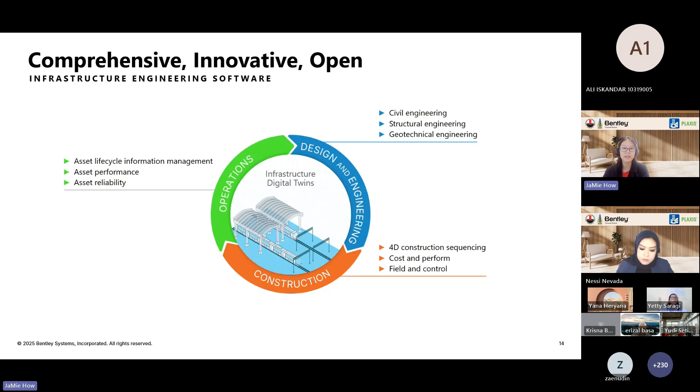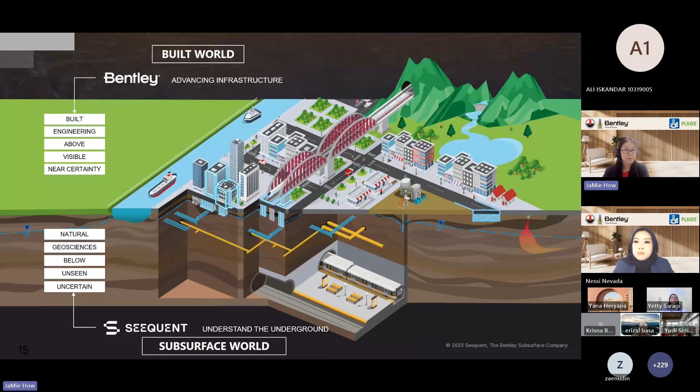In most of the solutions, what we can see are the above ground solutions in the built world, where we can see it easily because they are all constructed above ground. So we also have a group of solutions which covers the underground, whatever is in the subsurface world under the Seequent group. That is grouped under the Bentley Geotechnical Engineering Solutions, and it comes in three main categories as shown here: geotechnical information management, geotechnical modeling, and geotechnical analysis.

So for geotechnical information management, we have OpenGround for you to manage and consolidate all your subsurface information, so that you can all refer from one single source of truth, all the way from site, after lab test, and to the designer as well.

And then for geotechnical modeling, we have Leapfrog Works, which you can use to model the subsurface geological profile for you to make better decisions because you can visualize what is underneath more easily. So this can help you save time in decision making as well.

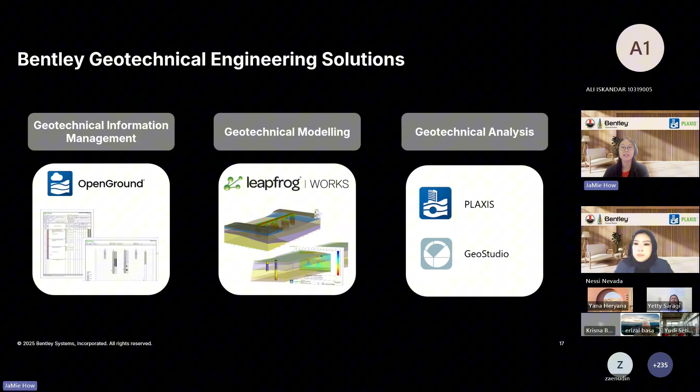And lastly, in terms of geotechnical analysis, we have PLAXIS and GeoStudio. Today our focus will be on PLAXIS, which is the finite element solution, and GeoStudio is our limit equilibrium solution for slope stability analysis purpose.

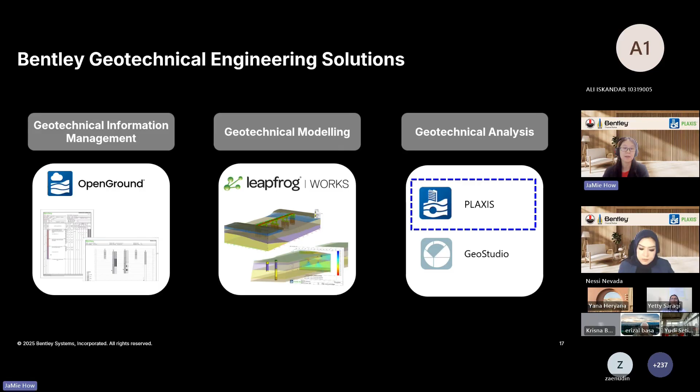In terms of geotechnical analysis, it covers many different types of work, all the way from offshore to nearshore to upstream like dams, and to on ground as well for buildings, for utilities, infrastructures like roads, rails, underground tunnels, for mining work, and also for infrastructures like airports. Geotechnical work covers a huge work scope because anything that we construct is either on ground or underground, so we always need to assess what is the impact of the structure and the loads from those structures or utilities, and how the ground reacts to them. This is where geotechnical analysis comes into the picture.

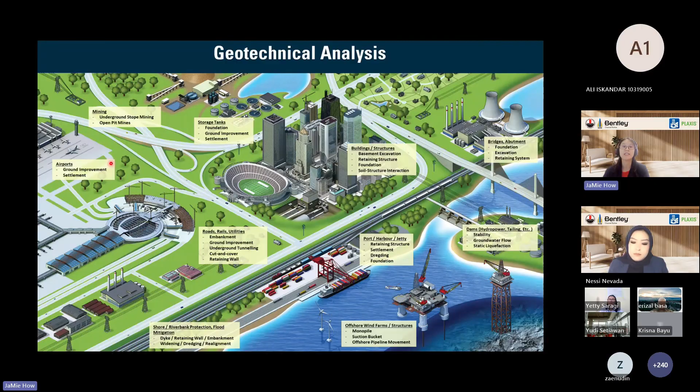In terms of PLAXIS, it comes in 3 different products: 2D, 3D, and Monopile Designer. PLAXIS Monopile Designer is for laterally loaded monopile design. This is mainly for offshore wind farms where we have single large diameter piles for the wind turbines.

And PLAXIS 2D and 3D each come in 3 different product tiers, as you can see here. The lowest tier is called just 2D and 3D. Then we have the advanced tier, and we also have the ultimate tier. This slide here shows a simplified comparison between the 3 product tiers of PLAXIS 2D and PLAXIS 3D. For very basic analysis, just plastic and safety analysis, you can always go for the lowest product tier.

If you require anything more, such as consolidation, steady state groundwater flow, creep, pseudostatic analysis, and degradation of soil due to cyclic loading, then you will require at least the advanced tier. For the ultimate tier, this is the highest tier. If you require more advanced analysis like transient groundwater flow, transient loadings like vibrations, traffic load, liquefaction, seismic load, then you will require the ultimate tier.

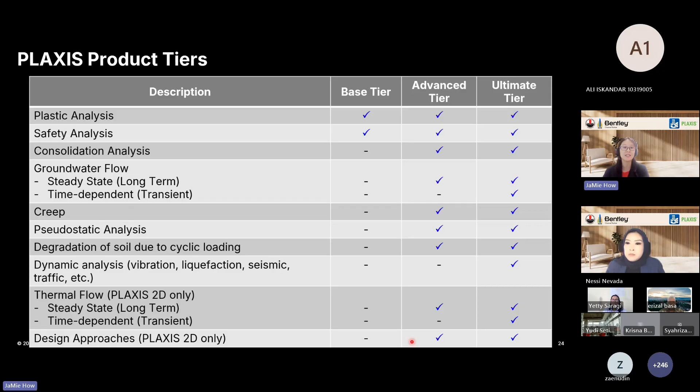And if you are designing to Eurocode, and where you need to have input of the design approaches and the partial factors, then you require at least the advanced tier. So today's topic is on excavation and shoring. This is just an illustration or an image of how it is usually done in PLAXIS.

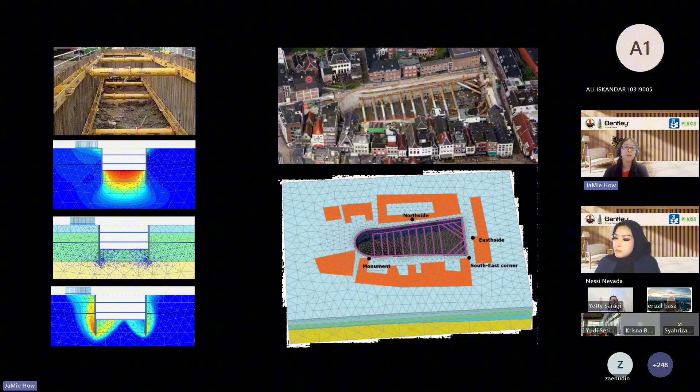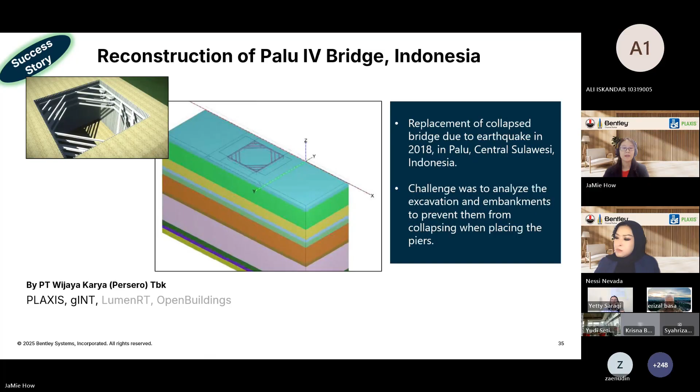In this case, as you can see, PLAXIS is used for the excavation check of this temporary shoring of the bridge foundation. Next, we move on to a quick introduction to the Virtuoso Practitioner License.

Virtuoso subscription is a flexible subscription. It can be purchased by any entity, whether a huge entity or an individual—anyone can purchase it. This subscription is also very flexible: it's only for 12 months, and there is no commitment for you to renew. So if you only have a project for 2-3 years and only need the software for that time, this is a solution for you, because you can just use it and then let it expire. When you have a new project later, you can purchase a new subscription again.

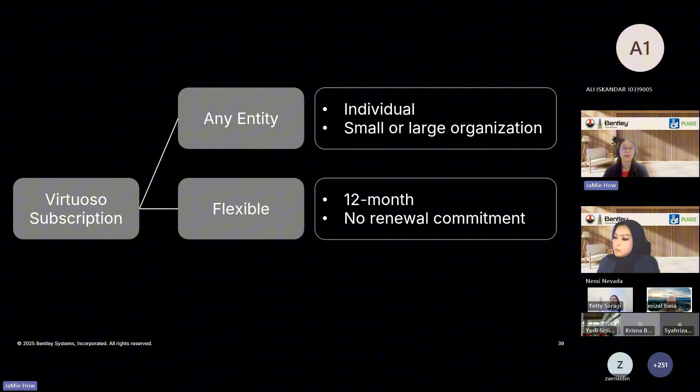Another thing users like about this subscription is the keys that come bundled with the license. Keys are like tokens or credits that users can redeem when they purchase a license. For example, if you purchase a PLAXIS license for Virtuoso, it comes bundled with keys, which help you unlock different types of free trainings. All these trainings are online, and can be standard training or customizable to your team's requirements.

For example, if you purchase the software today and payment is made, and tomorrow the license is delivered to you, then within 2 to 3 days from delivery, our technical team will be in touch with your team. You can then discuss your training requirements and how you can utilize the keys to carry out training for your team. It can be a standard recorded training as shown here—if you want to learn just the basic workflow, there is a recording you can watch as many times as you want, whenever you are free, for a period of 90 days.

Other than that, we also have live training through Microsoft Teams with our technical experts, so the content of the training can be customizable to what your team wants to learn. For example, if you purchase PLAXIS just for an excavation project and you're not too confident in it yet, you can discuss with our team and they will work out a module suitable for you using the keys.

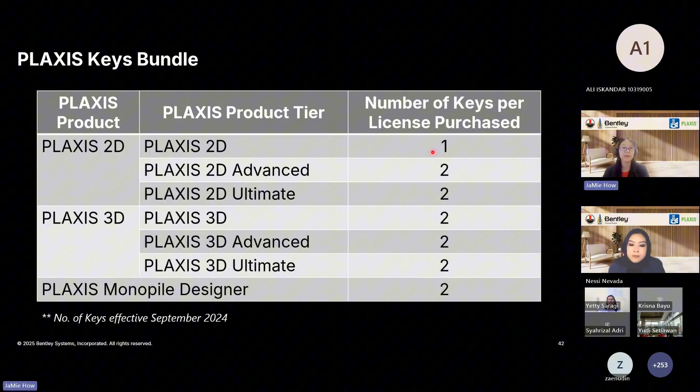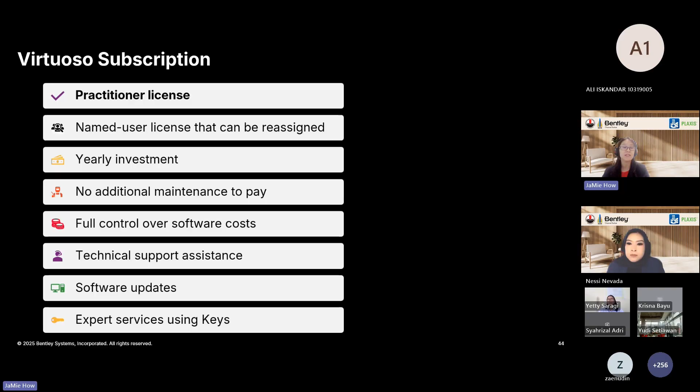Throughout your active subscription period, you get technical support through ticket submission. And if there's any new release of the software, you can download it for free, the latest version, throughout your active subscription period. Lastly, we have expert services using keys, which we explained earlier, for you to redeem free trainings for your team.

In today's context, we're focusing on the structural element and how we can get the structural response of our temporary shoring for our excavations. So that's very important. To begin with, in PLAXIS we offer a wide range of structural elements, and we're going to look at a few of those that are related to excavation modeling.

To begin with, in practice we actually differentiate the behaviors between a thin wall and a thick wall. For the former, the thickness as well as the geometry effect nearby are actually negligible, and plate element, if you've heard of it, is sufficient to represent the dominant behaviors other than end-bearing. So that's when you emphasize the bending behavior of the retaining wall - plate is actually the structural element that you would use to model the retaining wall.

And for the case of a thick wall, we may want to model the real thickness using the volume element with the constitutive soil model parameters. But the drawback of modeling the wall as a volume element is that no structural response will be available or directly available.

So there's, however, a trick - using that you could actually introduce a plate element just for the extraction of structural response inside a volume wall. So there are two approaches when it comes to modeling the retaining wall: either you model it as a line without physical thickness, or you model the actual thickness using a volume element.

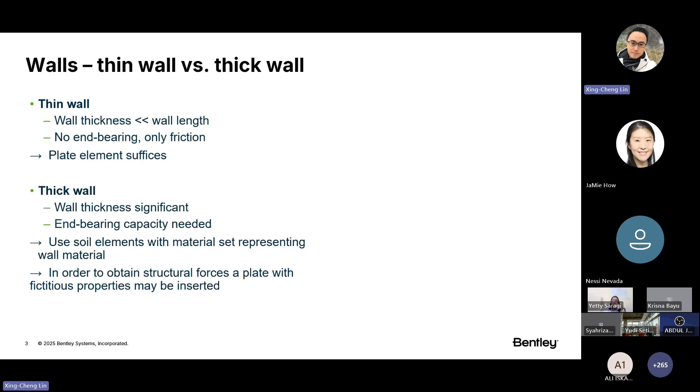So introducing the dummy beam approach that's related to thick wall modeling - that means now you model the wall as a volume, as a soil cluster. In this approach, we model the real thickness of the wall as well as its material properties using the relevant constitutive soil model. And in the geometry center, in the center of the wall, as the image shows, we insert a weightless plate element, but of course with some reduced stiffness - often in the order of 1,000 times or even 1 million times. And no interface in this case should be applied along this plate element.

After the calculation, we would multiply the structural response - say the bending moment or the forces - by the same factor that we have reduced. The initial vertical stress in the soil should be added to the axial force of the plate in order to get that genuine axial force of the wall.

So the idea is that you insert a dummy beam with reduced properties because your volume wall and its soil property already account for the strength and stiffness of the retaining wall. So now you insert this plate in the center of the volume wall just for extracting the structural response of the calculation - that means bending moment, axial forces, or shear force. The idea of introducing this dummy beam is just for the extraction of structural response. Therefore, you should not actually input the actual property of the retaining wall for this plate, otherwise you'll be over-accounting for the strength and the stiffness of the wall.

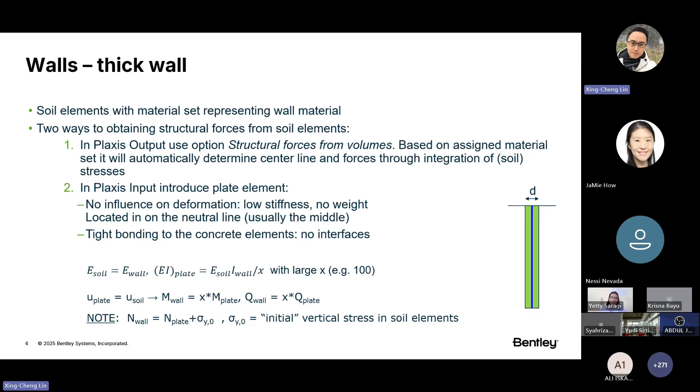Combined. So as you know, the excavation can be stabilized by struts or anchors, or even a hybrid system of both. For the case of a strut, it's the compressive resistance that's being mobilized, while for the anchor element - in this case it's fit for purpose - it supports the pre-stressing option as well.

As you can see from the image, when a half model is considered, we may use the point element like fixed-end anchor, together with the definition of one of its properties called equivalent length, and also the orientation vector.

That means although it appears as a point in the model, numerically the program actually considers this as a half span of the actual strut element spanning across the entire excavation. So although it appears as a point, some numerical formulations allow this point to behave like a half span of the strut element.

This is normally relevant when you're doing a half model, because when left and right are in perfect symmetry, you may cut the model into half, just to save some computational effort.

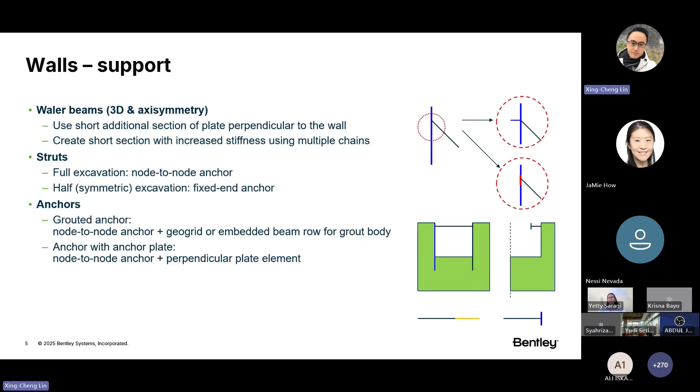For the case of a tie-back system using anchors or soil nails, the excavation is stabilized by the tensile resistance as well as the bond stresses, if the soil nail or grout anchor is being considered. In that case, you may consider a hybrid system depending on what kind of anchorage is relevant for the problem.

You can, for instance, use a combination of different structural elements to simulate the geotechnical applications of a grout anchor. It comes with two parts: the free tendon part of the grout anchor, which we normally model using the node-to-node anchor structural element from PLAXIS, considering the anchor group spacing and the main structural behavior of tension, while no interaction with the soil is required for the free tendon part. Basically, you just want to mobilize the tension for the free tendon part of the grout anchor.

The grouted part can be modeled using GeoGrid or embedded beam. The drawback of using GeoGrid in this case is that it presents a rigid connection with the surrounding soil, which does not give a good resolution of the genuine grout and soil interactions. So embedded beam is the preferred choice here.

It actually accounts for the relative slipping behavior between the grout and soil. So in short, the soil structure interaction, the grout and soil interaction, those kinds of relative movement and friction bond stresses can be mobilized if you consider the grout as an embedded beam element.

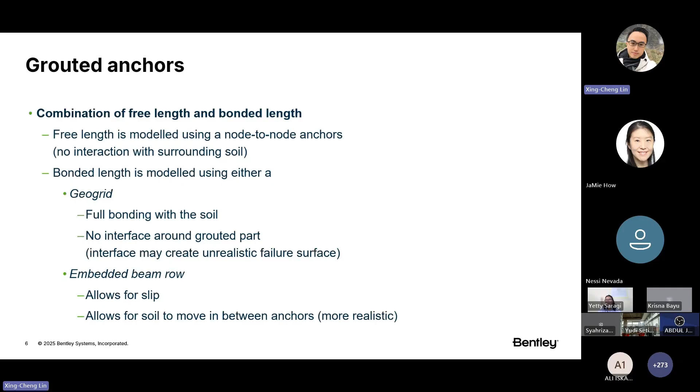For the embedded beam, we have a special interface that accounts for the soil structure interactions. So this is the typical combination if you want to model this kind of hybrid reinforcement system.

This, however, is not always the case if you consider a different combination. Let's say you don't use embedded beam for the grouted part, but use a geogrid element instead. In that case, you will see that part of the axial force actually goes to the soil, which is less realistic - these are the consequences.

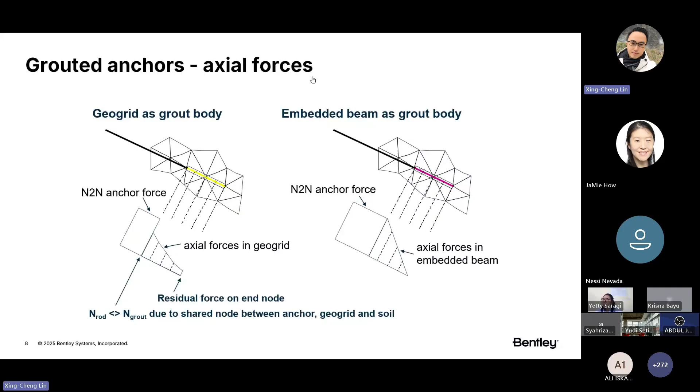The application of grout anchor involves some engineering uncertainties, for instance the size and the bonding between the grout and the soil. A typical application requires a pre-drill of some 10-20 meters to reach hard material for better anchorage, and over such a long span, certain parts of the borehole might very well collapse, resulting in some undersized reinforcement.

That means although the grout is intended to have some 250 diameter grout size, since the borehole collapses, you could very well end up with some undersized grouting reinforcement.

So this is something beyond what PLAXIS could handle. What happens in PLAXIS is an ideal situation, so everything is in perfect consistency. So this is something you need to be aware of.

Preferably you have a representative pull-out test in the field. You can use that to calibrate the numerical resistance in PLAXIS, to at least avoid over-prediction of the performance. So if you have a few pull-out tests of the anchor in the field, you can model it in PLAXIS and use it to calibrate its capacities.

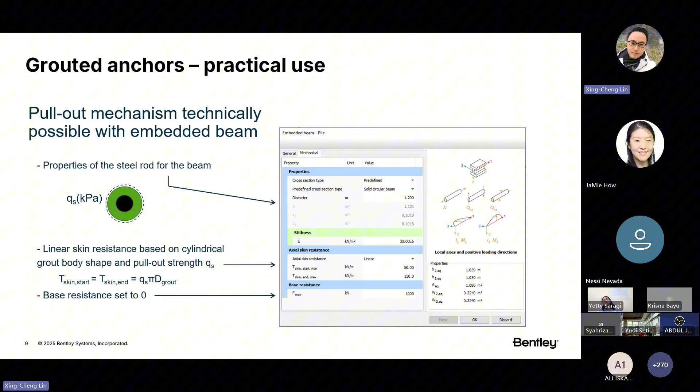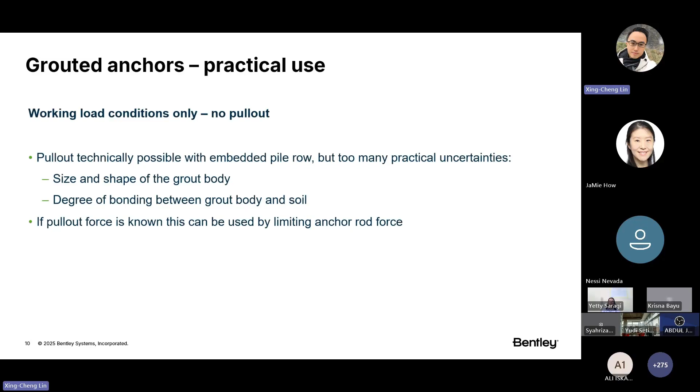So when modeling the grout using embedded beam, you have to define the skin resistance profile, as mentioned, based off a pull-out test from the field. Be aware that the input of skin resistance in this case is in the unit of kilonewton per meter. So in case you have a skin profile in kilopascal, you need to do a conversion by taking into account the circumferential length of the grout, in order to arrive at the input value. So the unit actually matters - it does not take kilopascal, but kilonewton per meter, and a simple conversion by taking into account the circumferential length of the grout will actually solve the problem.

And soil structure interactions - by default, structure and soil in contact are rigidly connected to each other, meaning they share the same degree of freedom in all senses, which is less realistic. As the interface between the soil and structure, to a certain extent, they are weakened and slightly undergo differential movement in response to that loss of equilibrium.

And the interface element, in this case, has two sets of springs in the normal and shear direction to control the gapping and slipping behaviors. The interface element is a linear, elastic, perfectly plastic model, just like the Mohr-Coulomb model, and is governed by the Mohr-Coulomb failure criterion as shown in the image here, along with the shear and tensile strength.

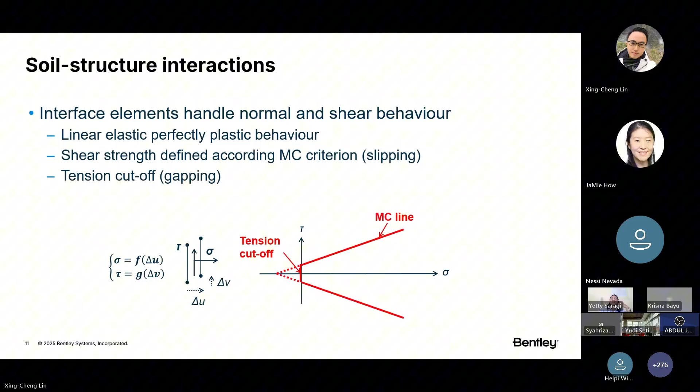By default, the interface properties are correlated to the surrounding soil through the R inter value. R inter value is the third or fourth tab from your material property for soil. You can find this R inter parameter - it has a range from 0 to 1 and is defined in the interface tab sheet for every soil or interface material.

So that means for an R inter value, when you input a value less than 0.5, there are some consequences - the interface and the soil stiffness will start to diverge. For instance, it might drastically reduce to just 25% of the surrounding soil stiffness, just when you define R inter equal to 0.5. So therefore you may want to refrain from using too low an R inter value after you acknowledge these kinds of consequences.

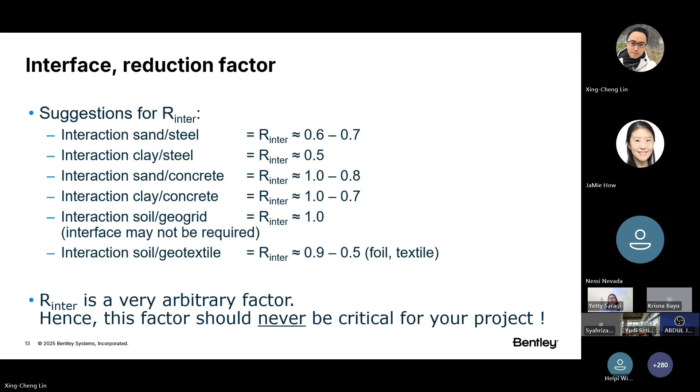All right, so moving on to the second part. There are a couple of considerations when it comes to model boundary selection. It depends, for instance, on the type of analysis you are doing, the type of behaviors being considered.

And in case the geometry and loading is in full symmetry, like as mentioned earlier, you may simulate just half or even a quarter of the problem in 3D or 2D. The guideline for model boundary selection is that the chosen boundaries should be large enough to accommodate all mechanism development, but not excessively large that would cause additional computational effort with no significant increase in accuracy.

So for instance, you wouldn't need a 200-meter wide model just to analyze a 5-meter wide excavation. For an excavation problem, we have a criterion saying the model size should be no less than 1.5 times the wall length or 3 times the final excavation depth, whichever is larger.

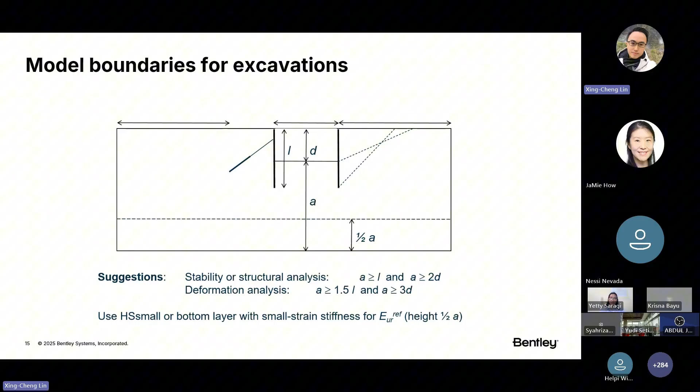For A parameters less than 2 times the D parameter, the wall displacement will be influenced by the vertical boundaries, yet there's no direct evidence that the structural response will be affected. So these are some of the known consequences on model boundary selections in terms of model width and model depth.

So an excavation problem, as you know, involves predominantly unloading, but also some shearing and primary loading depending on the stress state and whether or not you have reinforcement introduced - like in excavation or temporary shoring, those are actually a form of reinforcement.

And the HS small strain model, as mentioned earlier, is the preferred choice for excavation problems with features like small strain stiffness and also shear hardening and nonlinear unloading-reloading response. These are the typical features of the hardening small strain soil model, which is quite sought after for modeling unloading problems like excavation.

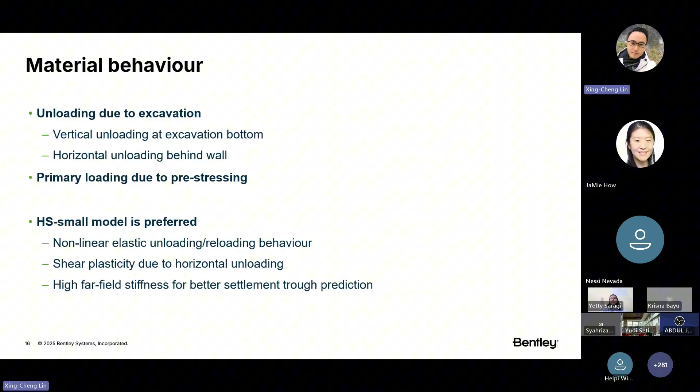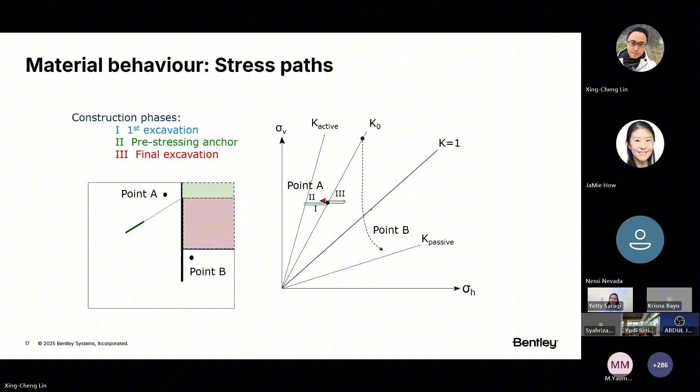And the soil behind the wall, in this case, is predominantly subject to horizontal shear and depends on the initial stress state. If the soil is over-consolidated, then the behavior at the very beginning will instead be governed by EUR, the elastic stiffness, up to a point when the deviatoric loading - that means the shear - takes place. Then E50 will get in to actually control the shear deformation. So this is the behavior of the soil next to the excavation.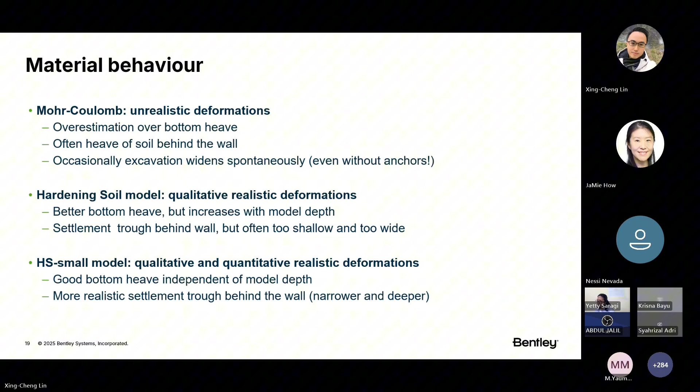We'll actually go into a demonstration on the fly. Let me open up the PLAXIS program. All right, so you are in PLAXIS, by the way. Let's look at 2D, just for a quick idea.

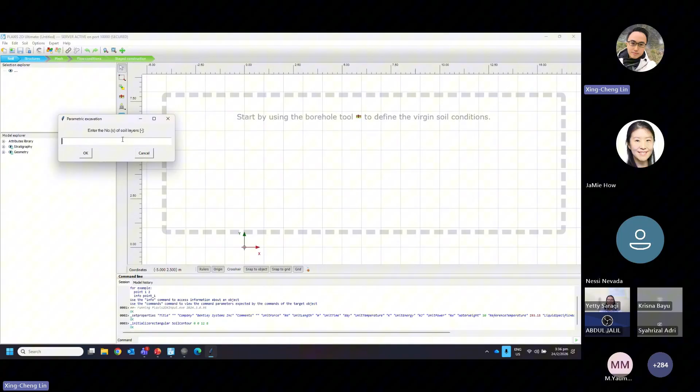In this case, we typically begin from the soil mode. You see there are 5 modes here. You can define as many boreholes as you want. Each borehole has the layer thickness and number of layers, which you can define as many as you want. So with one borehole, you can have as many layers as you want. In this case, let's go with an arbitrary number of layers.

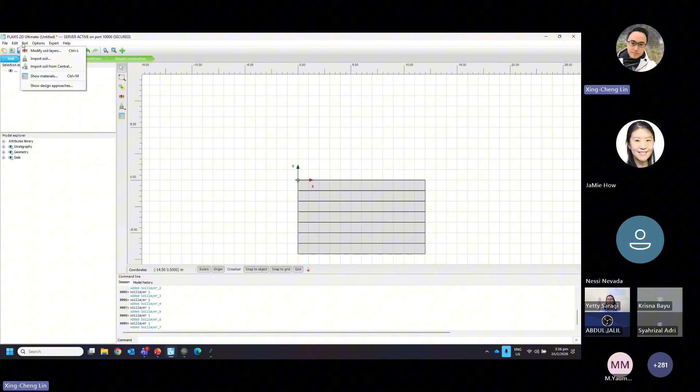So in this case, if you look at, you are in the soil mode, by the way. If you look at the borehole, this is how it looks like. Over here, you can actually define the material, define the number of layers, and define the layer thickness.

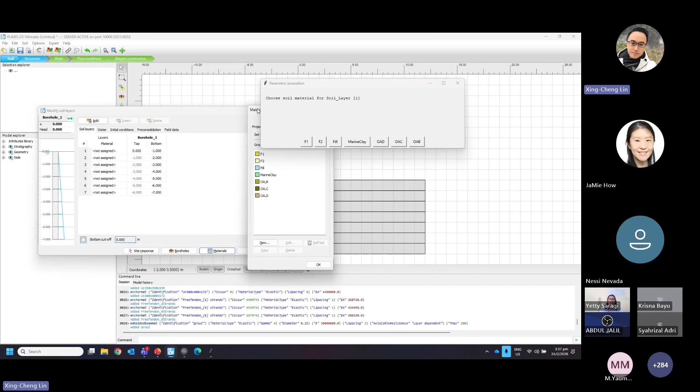Next, we're going to create material. If you already have the material in place, you can assign it in a drag and drop fashion. Let's go by layers. As soon as you see the color change, you know the material assignment has been successful. This is how you actually create and assign the soil material to the relevant cluster.

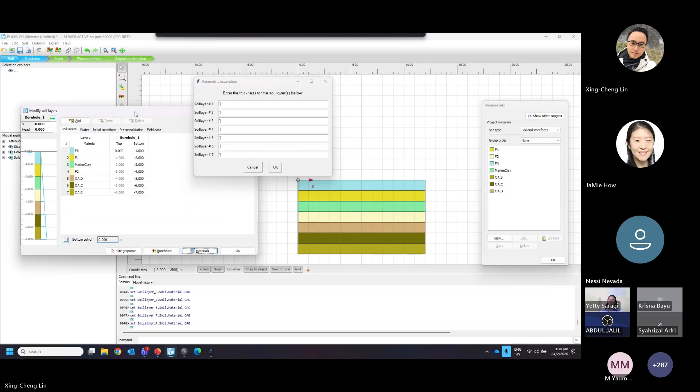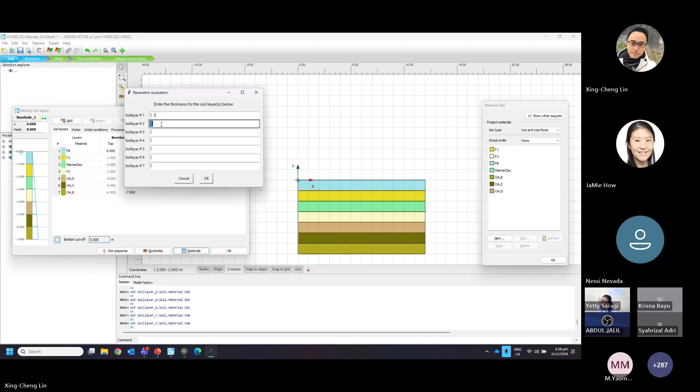All right, this way we finish defining the soil. As mentioned, here are the top and bottom coordinates of your layer. You can try changing all these values to achieve a different layer thickness. In this case, let's just go with an arbitrary thickness. This is how you could achieve typical borehole layers, many layers, each coming with different thicknesses.

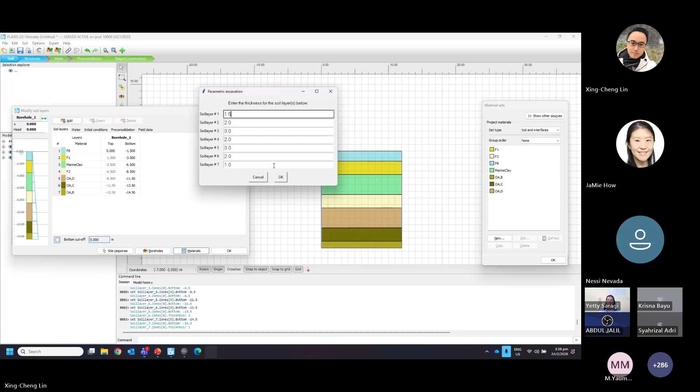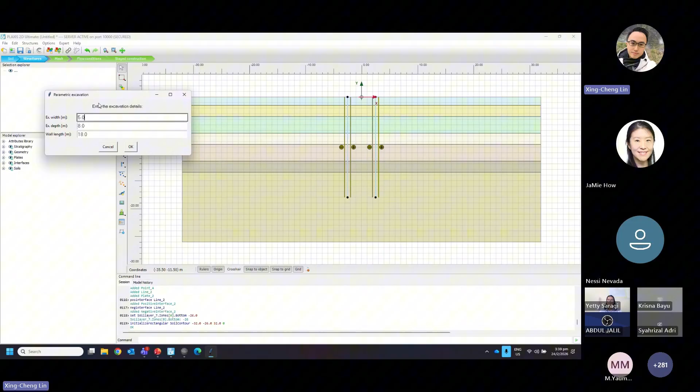Okay, so we're finished with defining the soil. The next step is to move to structure mode to define the excavation geometry. As mentioned, the model boundary depends on the width and depth of the excavation. In this case, you can look at different combinations of your excavation geometry, where there's a very narrow, sharp excavation, or some wide excavation, just like that. In this case, I think it's okay, so now the type of wall.

Likewise, here we use the line element to represent the wall. You can have different types of wall, like sheet pile wall, or any other diaphragm wall, depending on how you define the properties for the plate elements. So the same line elements can achieve different combinations.

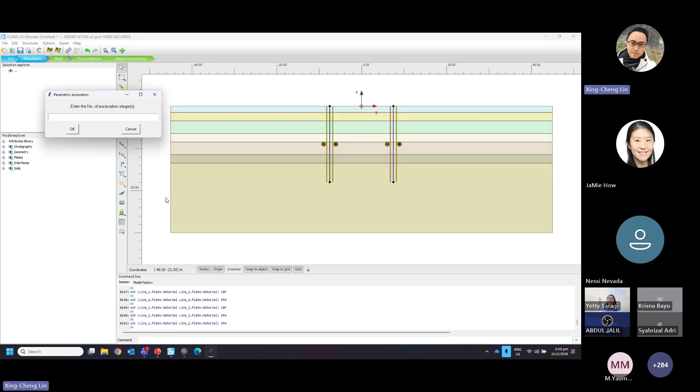And you need to define the excavation stages, how deep you want to excavate by stage. You need to predefine this in the geometry mode, here in the structure mode. You can go to the stage construction to define it, but you need to predefine those stages first. Let's say we want to have 6 excavation stages.

So basically, you just create a cluster using the polygon tool. Then you need to specify, by telling the program, what are the 4-point coordinates for a typical polygon, what are their XY coordinates. So in this case, first excavation, let's say 2 meters. Okay, second excavation, 2 meters.

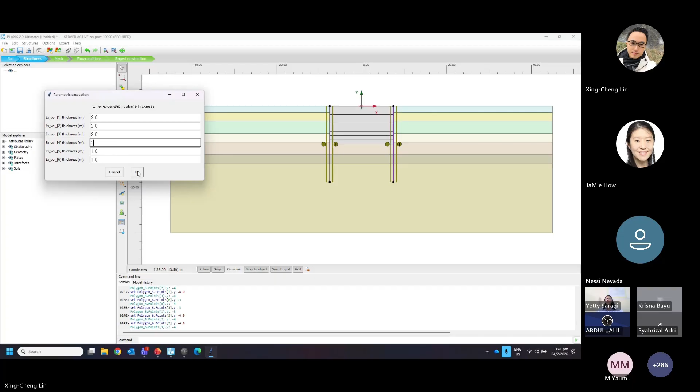All right, so this is how you could achieve this. So we have an 18-meter wall. Now how deep are we going down, let me check. 10 meters. Right.

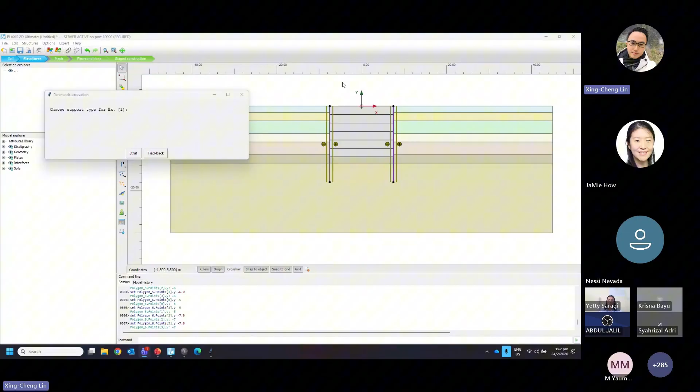Okay, so maybe. So then you define the wall, you define the excavation level by stage. Then you need to come up with the definition of shoring support or any loading, if there is. So two types of shoring that are common for excavation: strut element or tieback.

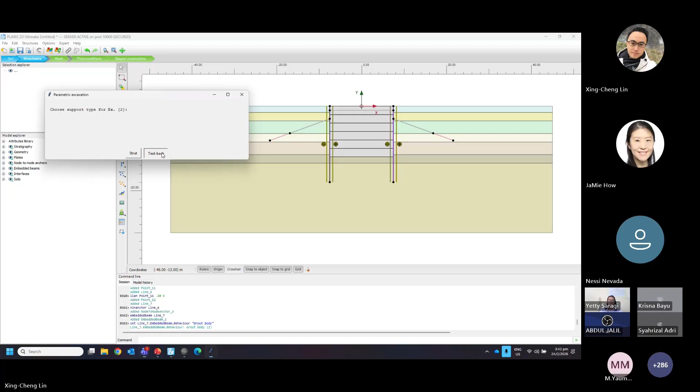So these are the two typical types. In this case, for the first excavation, we'll use a strut element to represent it. We just try to mix it up, so as a tieback, we try to alternate this kind of reinforcement just for the sake of illustration. Then we come back again with a strut element, and once again there's a tieback, so we'll go back to strut and finish up.

So as part of excavation shoring or prop design, you not just want to verify different support elements, different sections, but also the position of the prop. Whether it's midway down the excavation depth or slightly below, it's going to make a difference.

All right, so in this case we just leave it as default. We place the strut at the midpoint of the excavation depth. And then you need to choose the element - what kind of sections? In this case, we use a universal column, 400 by 400. Then for this one, tieback.

All right, so as mentioned, we have control on the prop position. In this case we make it a little bit lower, and in this case maybe extend it slightly longer. We can actually change the inclination too. So the idea is to reach out to competent geomaterial in order to have sufficient anchoring effect.

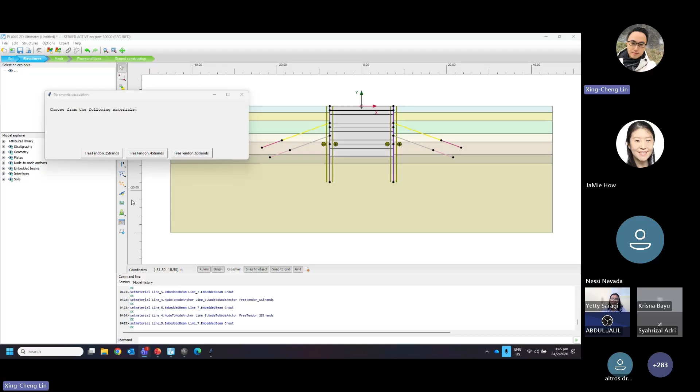Right, so this is what we normally do for excavation. And likewise for the free tendon part, we have different strands - whether it's a thicker steel tendon or slightly thinner. It depends on the number of wired strands in the free tendon part. The larger it is, the larger the actual tensile capacity it has. So this is how you actually define it.

Then for this one, we may as well look at larger sections as the strut. So for some wide excavations, when your strut spans over 10, 50 meters, we typically look at a laced strut, which combines multiple sections of the same kind to make it a bit bigger, in order to have larger buckling capacity. So this is what you normally do.

So then for this level, likewise, we could go a little bit lower, and we want to reach up deeper. Okay, and extend the length of the grout. So this is what you can do - this is what we call the iterative process. And with the PLAXIS program, you can actually use it to verify any design, any combination. So there might exist tons of combinations of design. The idea is that you could verify one at a time by using PLAXIS. So that's the idea.

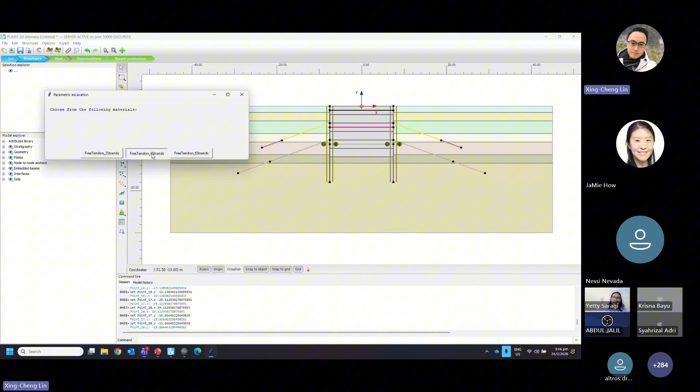So at this point we are done with the geometry creation. So what do we have here? We have the soil and the associated soil material assigned. And over in the structure mode, what do you do here? You predefine those excavation volumes by thickness and by stages. You need to predefine the structural element, the position of it, the type of support - whether it's a strut support, an anchor, or even a soil nail.

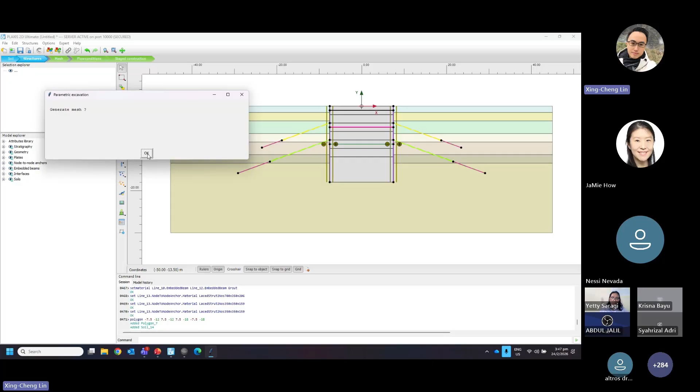All right, so all these things you must predefine. So for any soil and structure element you define here, you need to do material assignment - that means you need to create material properties for the structure and soil elements and assign them. All right, so then you can call it final and move to mesh, to generate a mesh for finite element calculation.

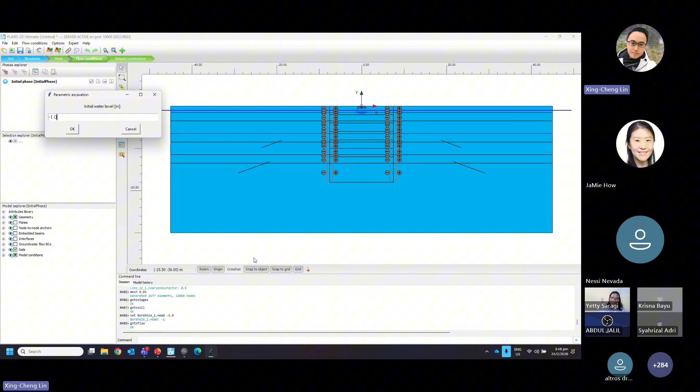So then you go on to define the excavation stages. In the borehole, you can actually define where the initial water table is for the model. There's a head field so you can quickly define the location of the water table in the borehole.

Realize this is a 2D program, so the spacing of the shoring is actually defined at its material property level. Unlike a 3D program, you can define how much they space with each other. In this case, the spacing of your shoring, be it on struts or ground anchors, going into your screen, is the kind of direction you need to define by its properties.

So strut spacing, in this case we leave it 7 meters for the first level. Then the tie-back spacing for this one, just use some arbitrary value, so 1 meter spacing. Also another one, I believe this is a laced strut, 7 meters, and also the tie-back spacing for this level, 1 meter.

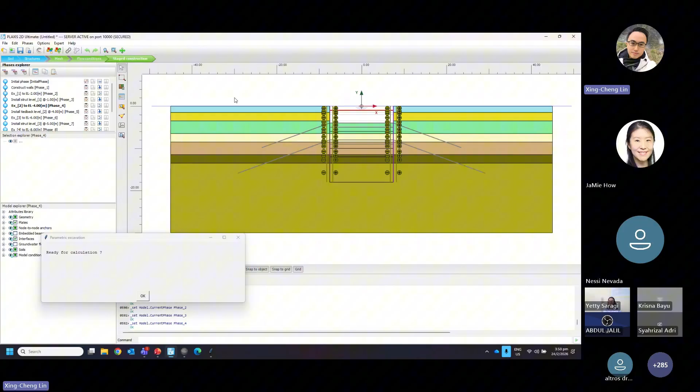Then we move on to the second excavation. Then we install the reinforcement, and in this case it's not a strut, but a ground anchor, which comes with a free tendon part and also a grouted part. And that excavation, install again the strut, excavate, and there you go.

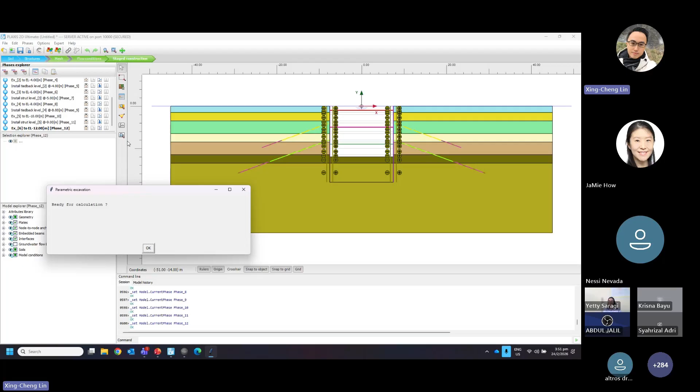So this is how we reach down to 12 meters in depth through 12 stages. You can actually calculate by stages and get the response in terms of deformation, how the soil deformed, and how your structural elements behave throughout the 12 stages, as real as it gets.

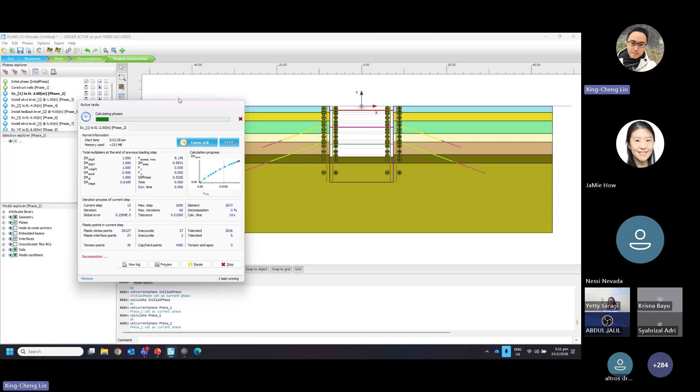So this is how you can closely simulate what's happening in the field. So take it to calculation, just like this. This is the active task window, with a bunch of information here. From here, you can actually see how the problem converges or diverges. There's a lot of digits giving you insights on how the calculation of a particular stage goes.

So you see this kind of excavation problem, basically we have repetitive activities. You cut, you activate, and then before you cut again. So this is kind of a cycle, very repetitive in nature.

So when you see this kind of graph, it actually reaches a parameter called summation Mstage in the vertical axis to 1. That means the calculation finishes. So now we're at stage number 9, installing the reinforcement, in this case a tieback.

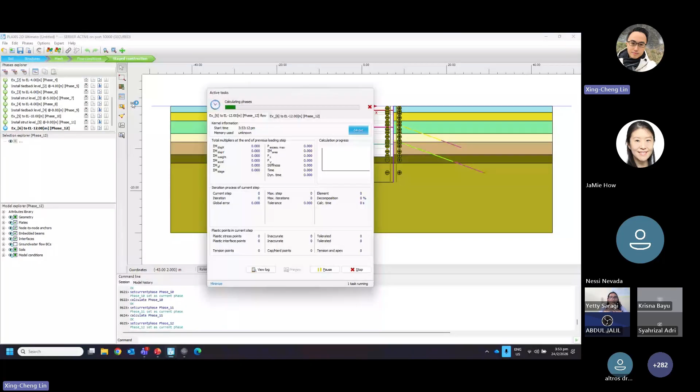Then we excavate down to minus 10 meters. This is the response. Now we are installing the strut at level 5, and now we're excavating down to the final excavation level, I think it's minus 12 meters.

So we are done. Then you can look at the result and check the calculation result by stages.

As soon as you land in our program, you see this kind of deformed mesh at some exaggerated scale. So what you want to look at, this is the end of calculation. You can drill down by phases to see what you want to look at, but in this case we look at the result at the end of calculation.

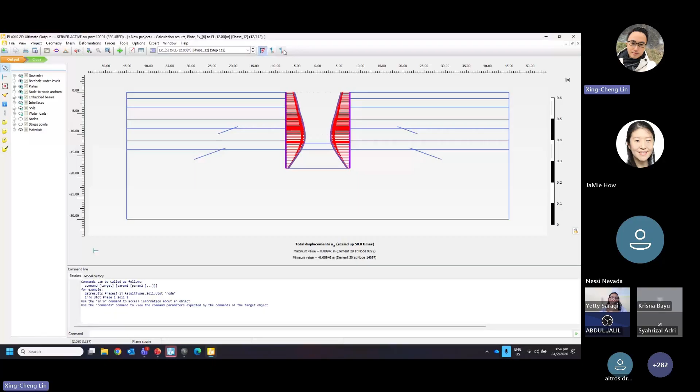So we look at the structural response, look at the wall. We select the plate. So what you can get out of the wall, probably you want to look at the horizontal movement or the wall deflection, and in this case you have the value here.

And the distribution, I may as well open the table, so it has the value of deformation at all points for both walls. You may copy all this over to an Excel spreadsheet program for plotting your own graph.

And there is also structural response, like shear force distribution of the wall at the last stage, bending moment, right? And you can actually activate an envelope tool, so the envelope has the historical extreme value, be it a maximum or minimum. So this is how you can get out of a PLAXIS calculation, not just on the soil, but also structural response, and then you can use all this for your calculation.

Then we can look at the bending moment throughout the stages.

Okay, so let's go to the very first stage when you install the wall. This is very small values, less than 0.1.

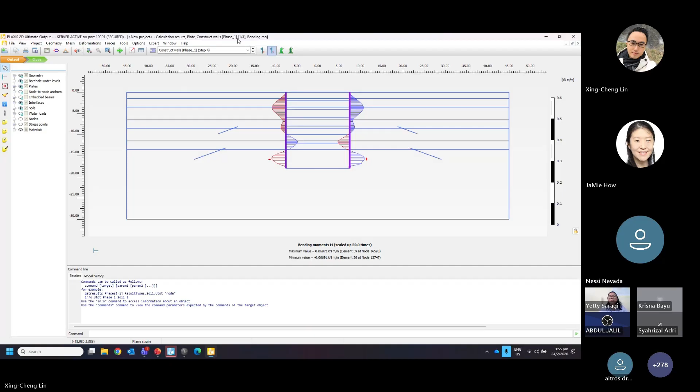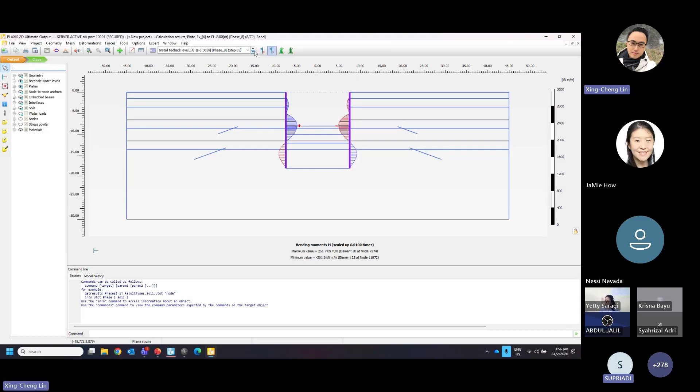As you install the prop, as you excavate, the wall starts to respond to the change. You see a double curvature when you excavate, in the second excavation stage, down to minus 4 meters. Then excavate to 6 meters, 8 meters. So we see how the structural response actually changes with stages.

So this is what you can do. You can query or interrogate the results in terms of soil deformation and also structural response, just like that.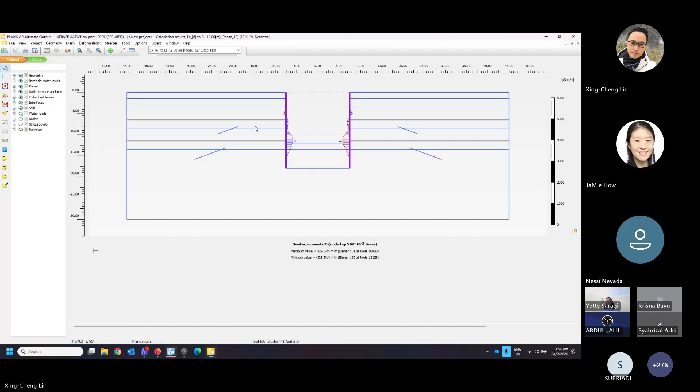In this case, you might also look at the earth pressure. We want to select the interface element, and here you can see the mobilized earth pressures.

This looks a bit different than what you do traditionally, there's a triangular distribution. But as you can see, since we're doing nonlinear calculation, that kind of mobilized earth pressure is not as triangular as what you perceive with the traditional way of doing it.

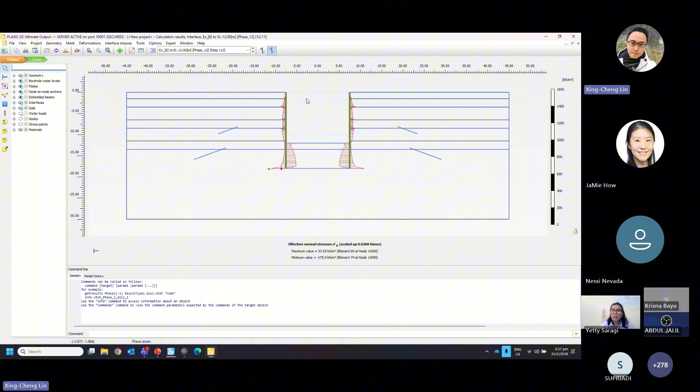This is based on the actual mobilization of earth pressure, and actually varies by different excavation stages. I can show you, or even different propping stages. This is unique about finite element calculations. The mobilized earth pressure is actually the result of calculation, it is not made known upfront. This is one of the quantities, after the calculation, that you could get.

And what else I want to show? You're probably interested about the structural response for the strut. So this is the values. In this case, it's been designed as a purely compressive element, anchor. So you get the mobilized axial capacity. In this case it's 311 for the first level of strut at the end of calculation.

Then how about the second one? At the end of calculation, your second level of strut is like this amount. Wow, that's gigantic, that's almost 10 times your first level. How about the last one? It's more or less.

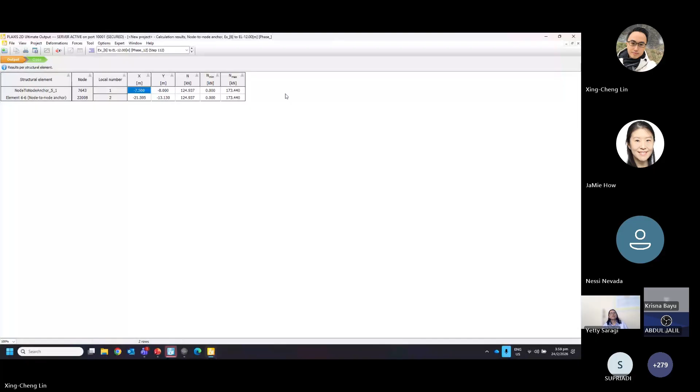Then what I can get for the free tendon part of your tieback. You see for the first one, it's very small in tension. And how about the last one? It's not as large as the strut element. So this kind of tieback is a bit slack.

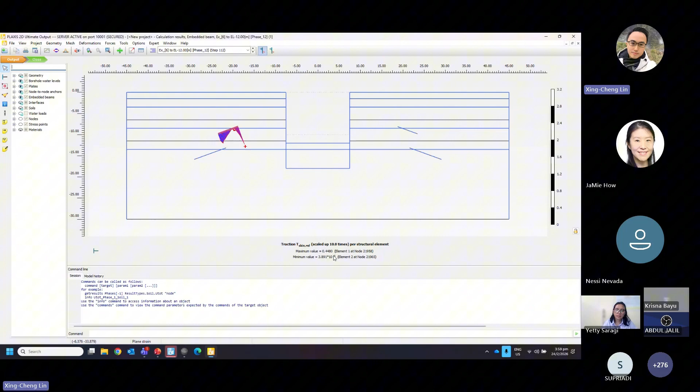So how about the grouted part? You can also check the grouted part, check the mobilized capacity. So this one is the capacities. In this case, the grout strength for this one at the end of the stage is being mobilized about 45%. For this case, then how about other parts?

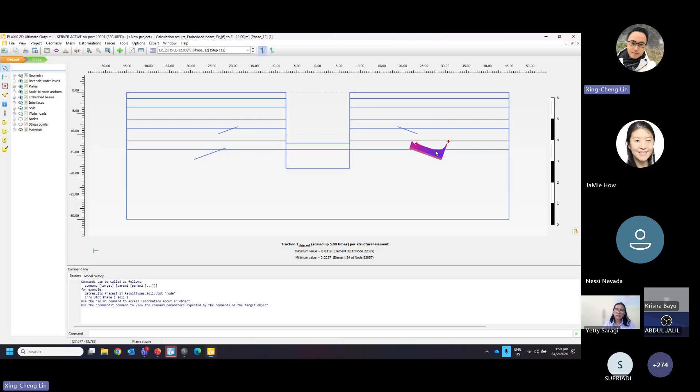If we look at the mobilized bond stresses, in this case it's more uniformly mobilized for the tieback grout at this level at the end of calculation. So these are some of the ideas you can get out of the calculation. And these are the actual mobilized skin friction. You can look at the shear force as well, axial force, and bending moment even for the grout.

And what else? I think I want to show, let's see for an anchor here. Likewise, we can get the soil response just like that.

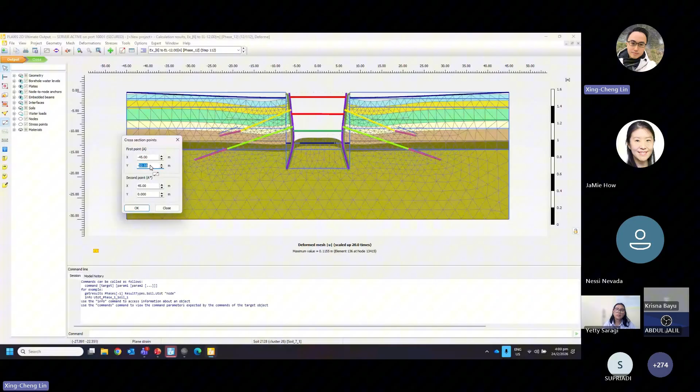So you're probably interested in what's the settlement profile, meters away from the excavation. In this case, we may use the cross-section tool to just cut an arbitrary cross-section in the direction you want. We cut along the ground surface, then we look into the quantity, in this case settlement.

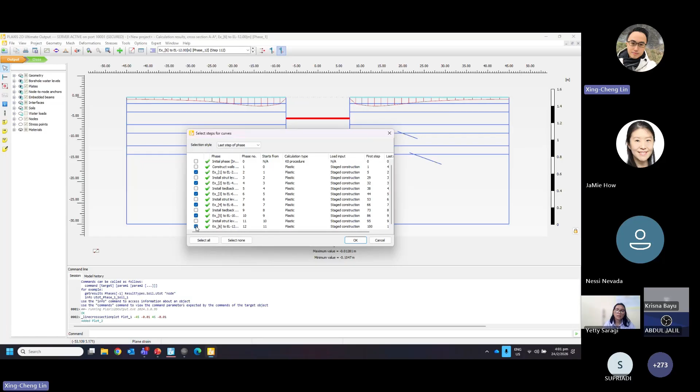So this is the settlement profile at the end of the calculation. Then you can make use of the cross-sectional tool, select major excavation stages. This will give you an idea of how the ground settlement profile changes at different excavation stages. You can make use of this tool.

You're going to generate a curve just like this. So this is the settlement, vertical axis is the settlement, and this is your excavation. Your excavation width, the left wall, right wall. So this is how the settlement is going to be like.

So for this curve, excavation stage number 6 is the final excavation. We have the first excavation, that gives you a peak settlement around 27 mm, then second excavation 38 mm, 57, 71, 90, and 105 millimeters at the end of the calculations.

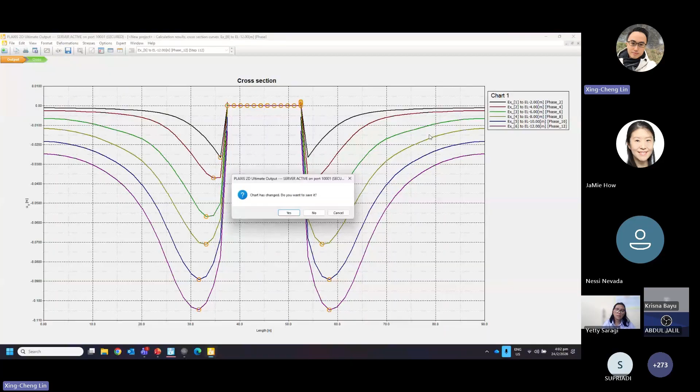And you can also do this. We cut in the vertical way. So this is to understand the horizontal deflection profile, which switches on the x component, which is the horizontal. And I think there's a way of making it move.

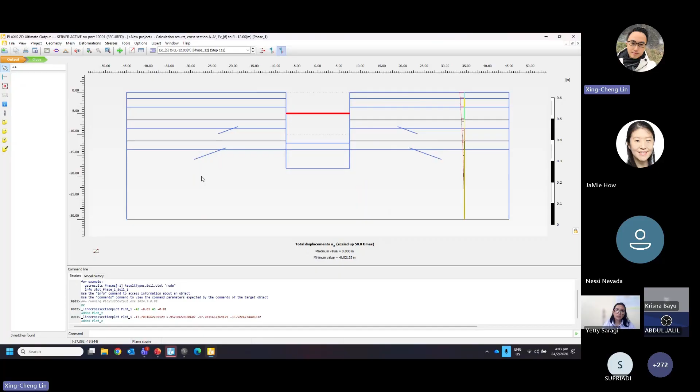I think there's a way of making this cross-section move. Right, so this is something like a live cross-section, you see? So as I move, it actually gives me this kind of close real-time feedback of how the horizontal deflection is going to be like across the entire model. So this is the beauty of a live cross-section tool.

All right, so I think with this last frame, I will conclude the presentation. So I'll turn it over to the host. Thank you.